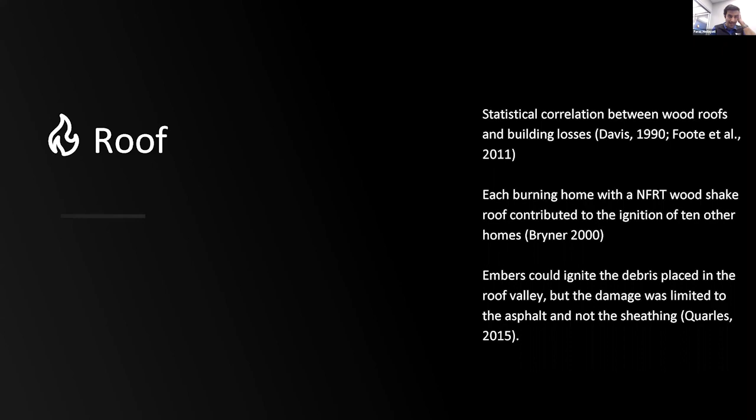So with that, roofs are, move this around here. Where's, I have, my clicker doesn't work for some reason. Okay, so

The first item that is important in Wildfire Prepared Home is roofs. Roofs are large elevated surfaces that are a prime location for embers and debris to land on. And when these two happen at the same time, so we have debris and then we have embers, well, surface fuel ignites easily, and then we have flames on the roof. And that's not what we want to see, right?

Roofs, because of their geometry, create low pressure and high pressure areas on the roof. And both embers and debris tend to accumulate at high pressure areas on the roof, typically roof valleys. And there are different ways that roofs are being evaluated in the field. You see some stats here. I'm not going to go through them, but the references and the quotes are there for you to look at the studies. But nearly all post-event investigations report a correlation between roof type and the damage level.

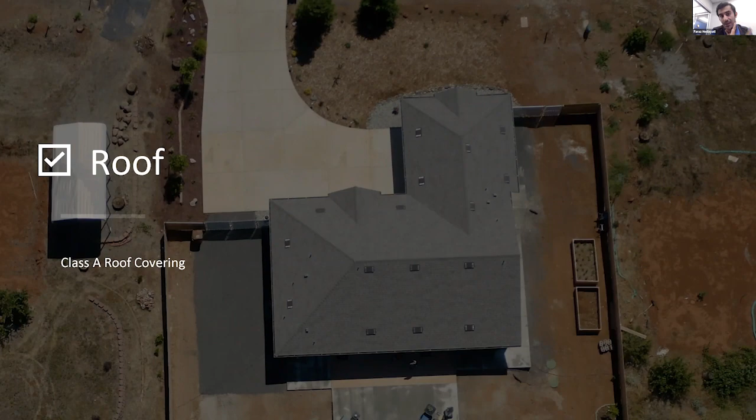And because of that, in Wildfire Prepared Home, we require the roof to be a Class A material. That's asphalt shingles, and 90% of the market is already that. But we also have metal roofs and tiled roofs or things of that nature, which are non-combustible materials. Those are also compliant with Wildfire Prepared Home designations.

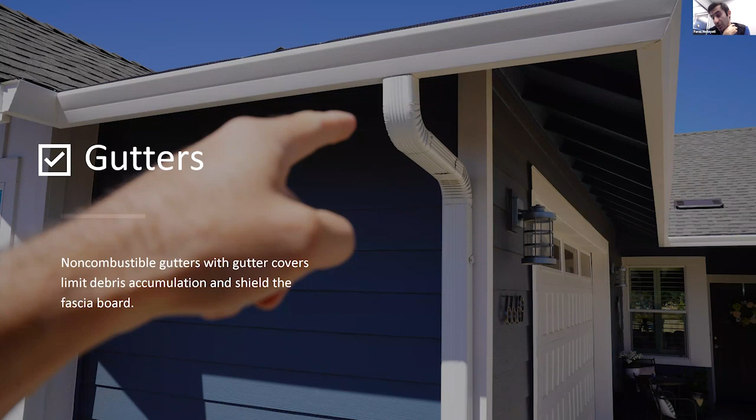So we require all the gutters to be non-combustible. The added benefit of that, beside embers, is that non-combustible gutters typically protect the fascia board or the other wood components in that area, rafter tails, for example. They protect them against flames and they don't ignite. We actually saw this happening at IBHS, where we unwantedly ignited the building after the vinyl gutter melted, and then the fascia board was exposed to radiation from big flames, and then we had ignition on the fascia board.

Next one is vents. Typically, the attic area is naturally ventilated, meaning it's natural convection. Hot air gets out from the ridge vent, and then the cold air gets in from the bottom part of the attic. But what happens in a wildfire scenario, because of the elevated wind speeds, the pressure distribution on the roof and at the vents changes. So the outlet vents could become inlet vents, because the pressure outside is higher than the pressure inside, and embers can get in.

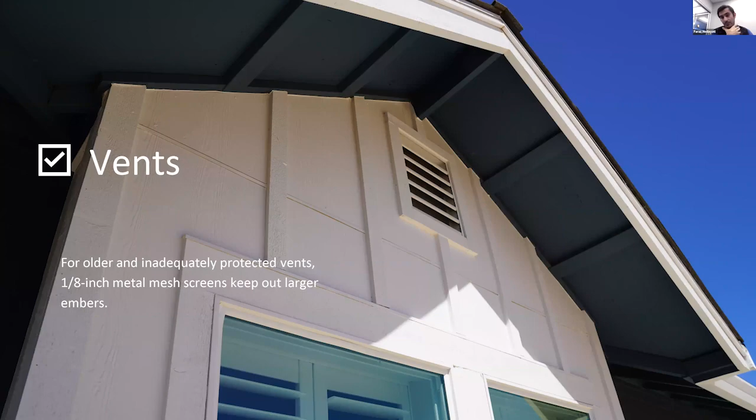And the caveat here is that if we see flames coming out of the vents, it's already too late to defend the building, right? So we want to stop this at the beginning, and we require a 1/8 of an inch mesh screen to prevent larger embers from getting in. If you look at the literature, other mesh sizes such as 1/16 are also recommended. I think that becomes a maintenance issue, because when it's that small, debris, dust, and all of those other things accumulate and block the ventilation, and we don't want unwanted consequences such as moisture building up in the attic area. And that's why we go with 1/8 of an inch, so it's not a maintenance issue anymore. So we require 1/8 of an inch mesh screen.

The other very important component that we require in both levels, and I'm talking about the base level here, is a 6-inch vertical clearance around the building. Remember I talked about high pressure areas on the roof? The base of the wall is also another high pressure area that we saw several times at IBHS. We are running a test, we are looking at vents, we are looking at windows, but we see ignition happen at the base of the wall. And that's because the heavier embers don't loft. They just roll on the ground because of elevated wind speed during a wildfire.

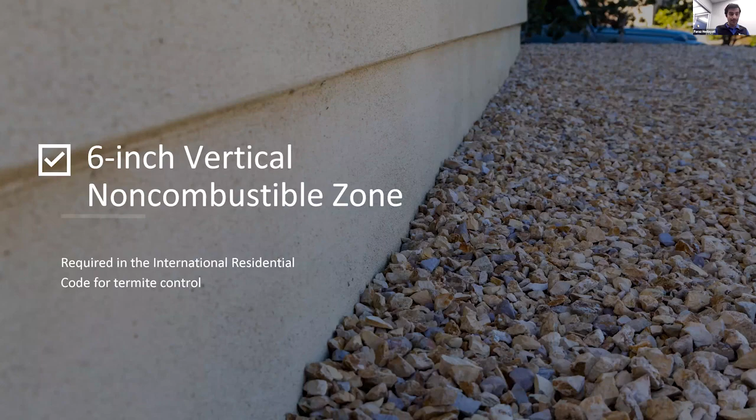And then they get stuck against the wall, and with the 6 inches around the wall, if there is a discontinuity between the fuel and the wall, the embers cannot convert to small flames. We will have, I don't know, thousands of embers accumulated at the base of the wall, but they're not touching anything to ignite and convert into flames. So it's just embers. Yeah, we require a 6-inch vertical non-combustible zone.

Defensible space. Numerous post-event investigations report a correlation between nearby vegetation and damage level. And in the next few slides, you see some of them. Syphard et al. analyzed some data that CAL FIRE generates. And the conclusion is if you reduce the vegetation density by 40% immediately adjacent to the building, the odds that the house survives after the wildfire are much higher.

And historically, if you look at defensible space literature, you see the philosophy behind defensible space was to reduce the intensity of the fire as it gets closer to the building. So typically there are two regions, 0 to 30 and 30 to 100, or the property line.

And the distance between shrubs or trees or any kind of vegetation gets lower and lower as it gets closer to the building. And that's because of converting tall flames into creeping fires.

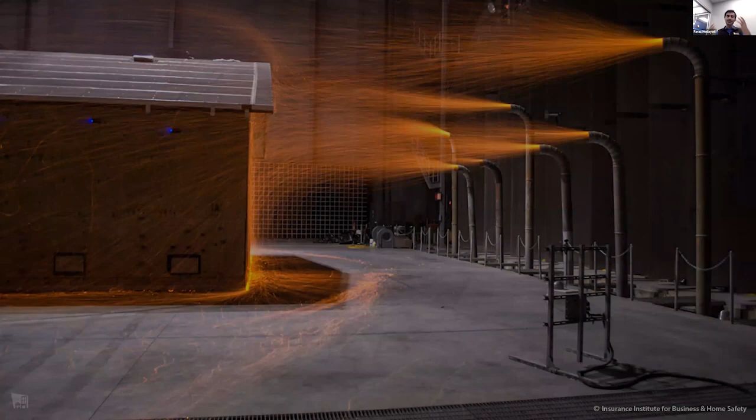And the reason behind this 0 to 5 foot, why it matters, besides stopping creeping fires, is that embers tend to accumulate at high pressure areas. And one of them is at the roof that I talked about, and the base of the wall, where you clearly see that glowing line at the base of the wall here. When the heavier embers hit, they just fall or roll on the ground and accumulate at the base.

The lighter embers, when they hit the wall, they bounce back. And you see that glowing arc around the building, right? And that is a function of building height. For a 1-story building, it's almost half of it. So a 5 feet clearance near a building would eliminate the chance of embers to convert to flames and expose building cladding to different flame intensities.

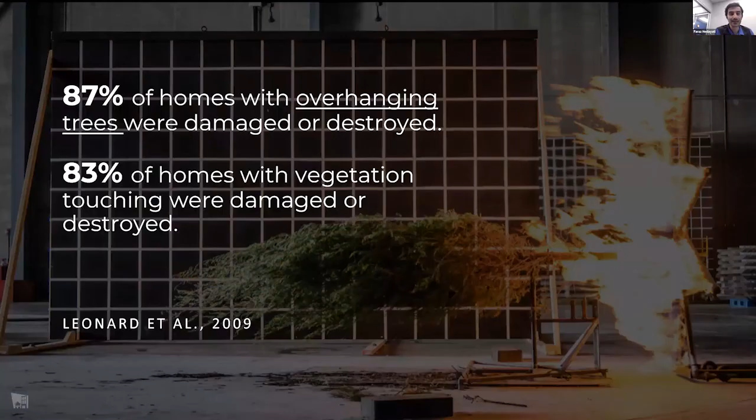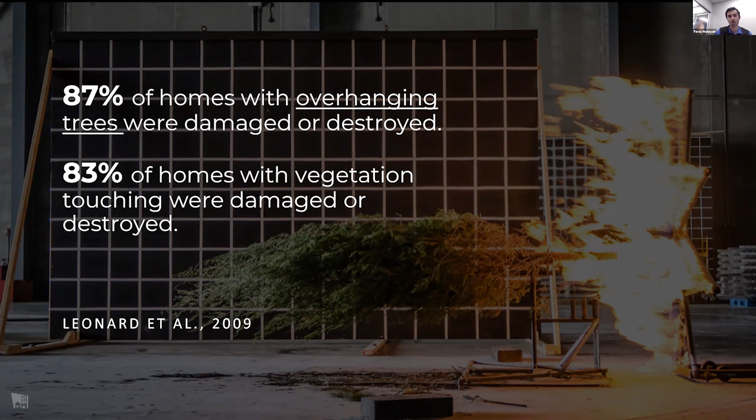And again, another stat from an Australian researcher: these are all 80%, 85, 87%, 83%. It's much higher than like 50 or 51. These are statistically significant numbers. Since the 90s, University of Nevada, Reno introduced the idea of the 0 to 5 foot non-combustible zone. And this was adapted by different organizations. IBHS started advocating for this since 2010, 2011.

And since then, there are more tools available for fire researchers to use and study this. One of them is aerial imagery. Zesty.ai, they fly drones around properties and collect the data. And when they looked at the 0 to 5 foot non-combustible zone around the building, they found a very interesting stat that it nearly doubles the property's survival rate.

And this 0 to 5 foot is what we recommend, but we see in the literature acknowledging 0 to 1 foot, 0 to 2 feet, 3 feet, 5 feet. All of those are available, but because we don't know, and this is an active project right now at IBHS, we don't exactly know what the risk is if we have something there. We take a conservative approach and go with the 5 foot while we are analyzing some data and running the experiments, and more will be shared with the public later on as we get more results of this.

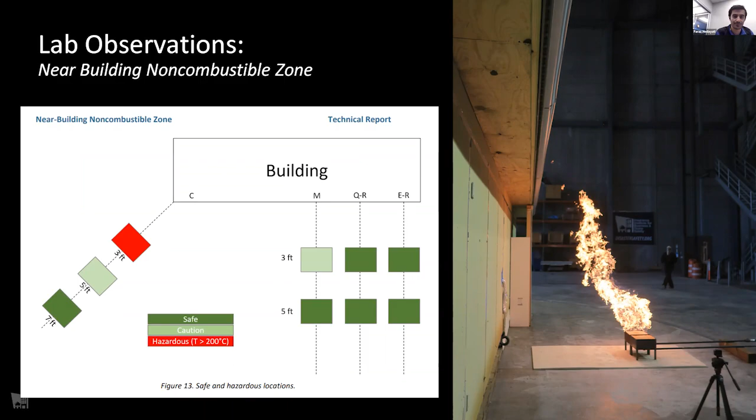And this is another test that we designed. It's a design fire, an 80 kilowatt fire source, 2 feet by 1, placed in different areas around the building. And we see that in most of the cases it's safe. At 3 feet, at the middle, it's caution. But at the corner, we actually ignited the building and we had to terminate the test. And that's why we go with a 5 foot non-combustible zone, because of this research.

The bottom line, we require a 5 feet non-combustible zone around the building to acknowledge embers and creeping fires. Fences are another source of fuel that exists in the 0 to 5 foot.

Can you see my screen? It's very choppy on my end. Yeah, we can see it.

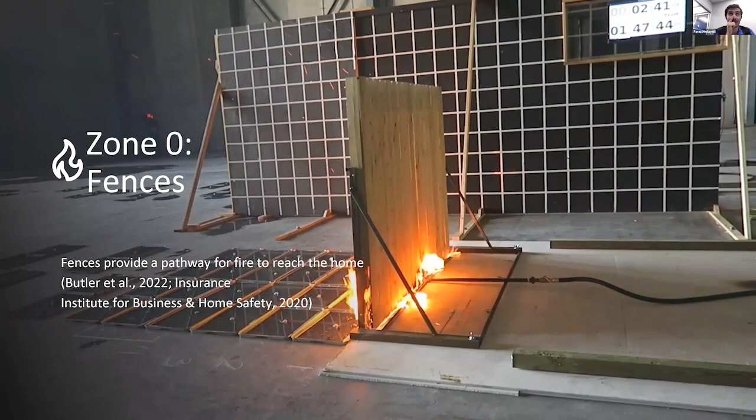Perfect. Yeah, these are again experiments that Steve Quarles done back in the day, about 10 years ago at IBHS. And we see how fences burn and how they can provide a pathway for fire to get to the building. You see 3 examples of Glass Fire, Marshall Fire, and Camp Fire. In Marshall Fire and Camp Fire, the fence was defended, so the first responders knocked down the fence and the building survived. If not, it could use the fence and go all the way to the building.

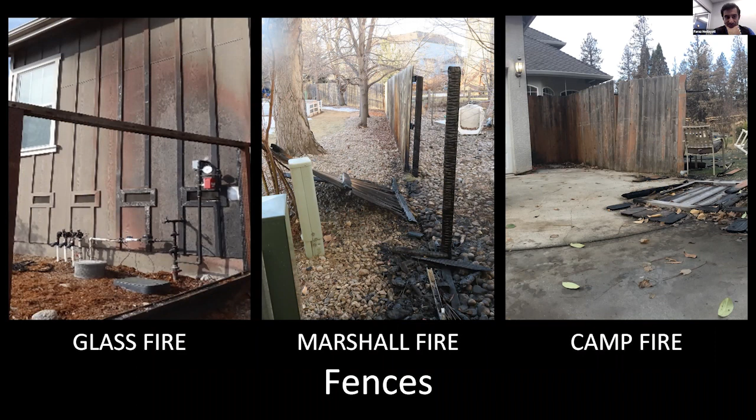The interesting thing here is that in the photo from the Camp Fire, the distance between the eave and the top of the fence is so low that the flames can easily touch. And that's actually like a multiplying factor into the vulnerability of the house if the distance is low and the fence is combustible. In the Glass Fire experiment, in my opinion, they were lucky that the window was not 2 feet to the right. Otherwise, the fire could break the window and get in. And again, that would be another story for this house.

So for fences, the section that is in 0 to 5 foot should be non-combustible. That's typically the gate or the door to get into the backyard. And there are off-the-shelf products available to use that are non-combustible, basically.

Decks. We studied decks since 2013, and this is still an active project, so it's been about 10 years. Decks are vulnerable to two different threats. One of them is embers accumulating on top and igniting the deck. The fire typically starts at the gap between the deck boards above the joist. That's the first place that ignites. And then it uses the joist to get closer to the building.

And this is a very, very slow moving fire. It takes 5 to 6 hours for the fire to get to the building, or travel 5 feet. A more severe exposure is when embers fall between the boards and ignite material underneath, then we have an underdeck flaming feature. That's a much more severe exposure, and that can ignite the deck, and then the fire can get to the house.

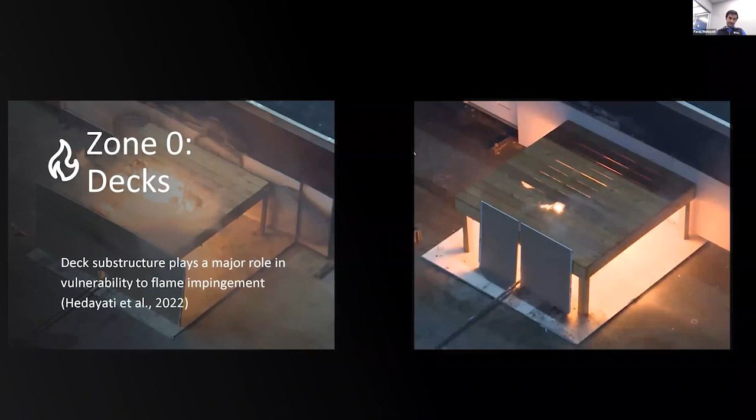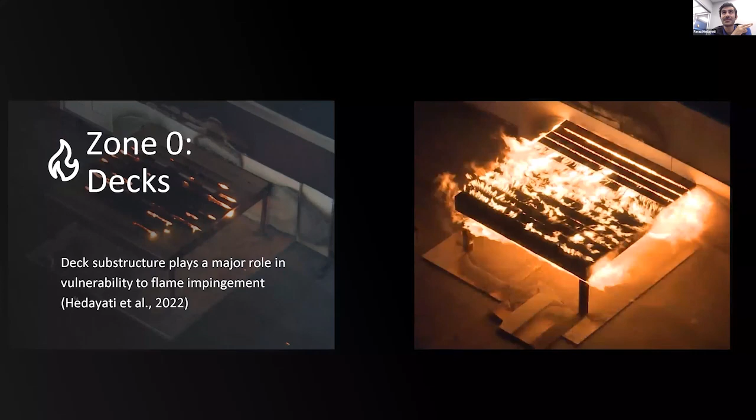These two videos, so I tested these decks back in 2019. Both of these decks are compliant with Chapter 7A. Chapter 7A refers to ASTM E2632, if I'm not wrong, and that only considers the walking surface of the deck, not the entire assembly. The walking surface in both of these decks is redwood, but the joist on the left-hand side is a metal joist, and the other one is southern yellow pine, which is a common joist material. And we see the difference, right?

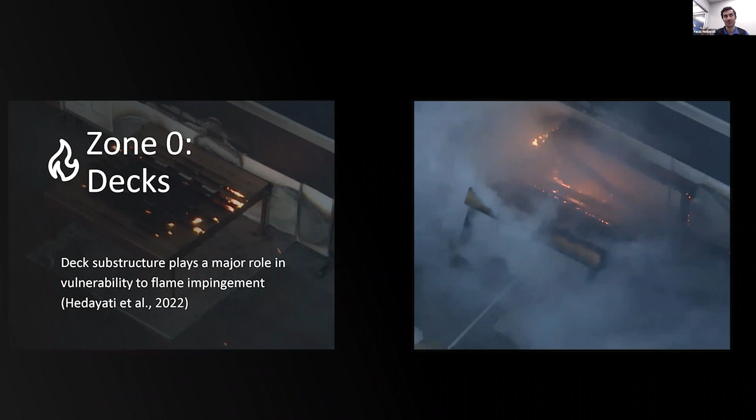And we are writing a proposal to change the ASTM test method. Instead of looking only at the walking surface, look at the entire assembly, because obviously the walking surface does not discriminate the performance of the deck. So in Wildfire Prepared Homes, at the base level, we require enclosing the underdeck area so debris cannot get in. And when embers fall between the gaps, they don't have any fuel to ignite.

So this was everything about embers. I want to move to flames, but I guess I can pause here and we can have a Q&A about ember threats if you have questions about what I went through.

I did have a question. This is Denise. Regarding heavy embers, I've never really thought about that, and I haven't heard a lot of discussion about heavy embers versus light embers, but it makes a lot of sense. I think we all do realize that the embers do like to accumulate against solid surfaces. A lot of times in these wildfires, there's a wind event, and so these embers are pushed or rolled or blown.

The heavy embers, I'm assuming they have more radiant energy contained inside them, so they would stay hotter or burn longer. Is there any testing that's been done on, once an ember gets into that right spot on your house, how much time your house has to resist a heavy ember versus a smaller ember?

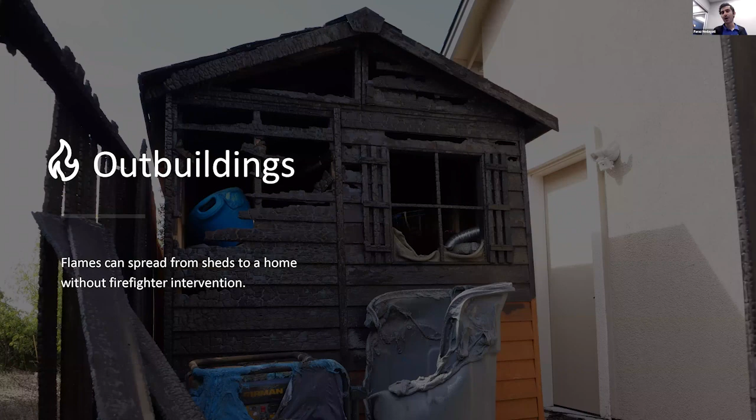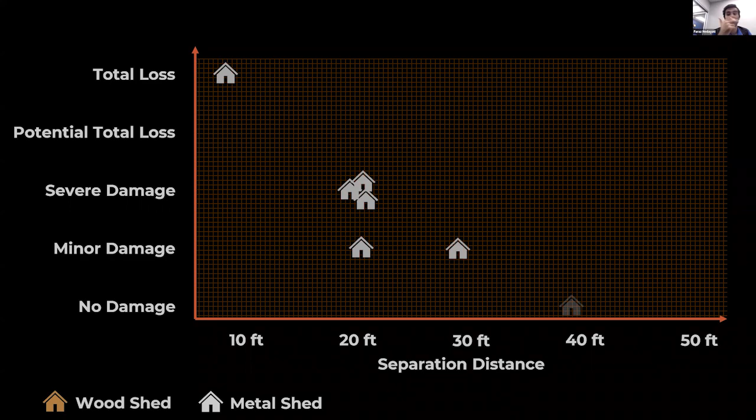And then we change the distance, 30 feet, 40 feet, 20 feet, 10 feet, to see how the building fails and which areas actually failed earlier in the experiment. We categorized the damage into 1, 2, 3, 4, 5. Total loss is when the building ignites. Potential total loss is when the window fails in a way that there is an opening so embers and flames can get in. Severe damage, window failure, siding failure, that type of thing is very expensive to fix. Minor damages are very cosmetic damages that can be fixed by the homeowner; in other words, no professional is needed. And no damage, obviously no damage.

And you see the different ways that we saw the damage happening. The wood sheds are the brown ones and the silver one is the metal shed. At 10 feet separation it is deterministic. 100%, we tested two buildings at 10 feet. In both cases, we had total loss.

So similarly, at 40 feet, this is again the deterministic. It's 0% that there would be any damage on the building. What happens between 20 and 30, we get into probabilities of how buildings fail. For example, at 20 feet, we had 6 tests, and 4 of them had severe damage. So 4 divided by 6, whatever it is, is the probability of severe damage at 20 feet, and so on and so forth.

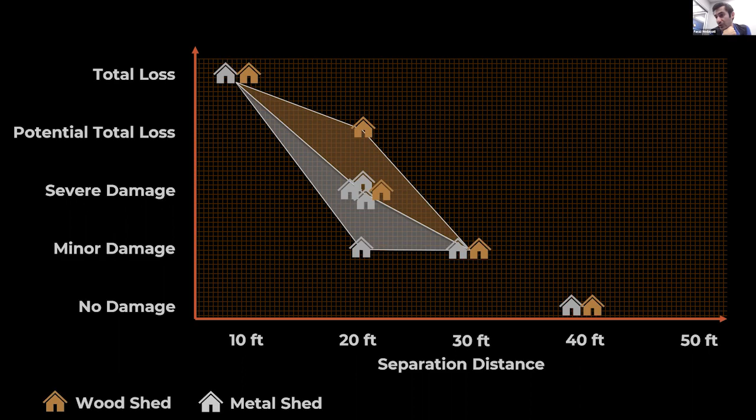We can look at this data like this. One way to look at it is that the severe damage is like an S-shaped curve. So at 10 feet, 100% severe damage, and then it rapidly declines as we get away from the building. For minor damage, 30 feet is the maximum, and we will not have any minor damage at 10 feet or 40 feet. So for the probability density functions, one of them is an S-curve, the other one is a normal distribution.

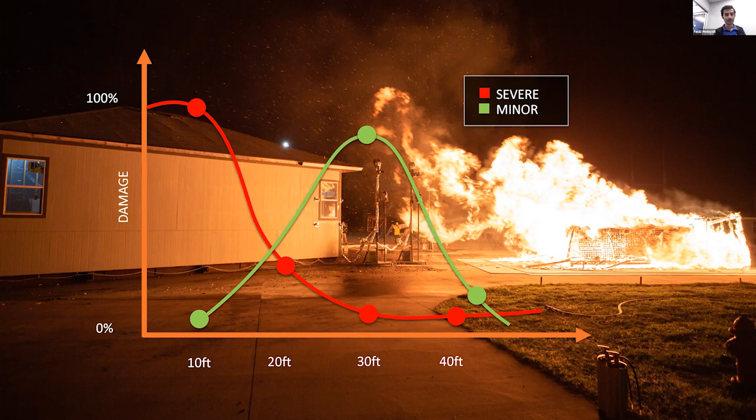So for outbuildings, we require all the buildings to be 30 feet away, and this is in the plus level. In the plus level, we look at embers and flames. In the base level, it's only the embers. Another thing that exists on the parcel level is fences beyond zone 0. The only requirement that we have is that we don't want any back-to-back fencing.

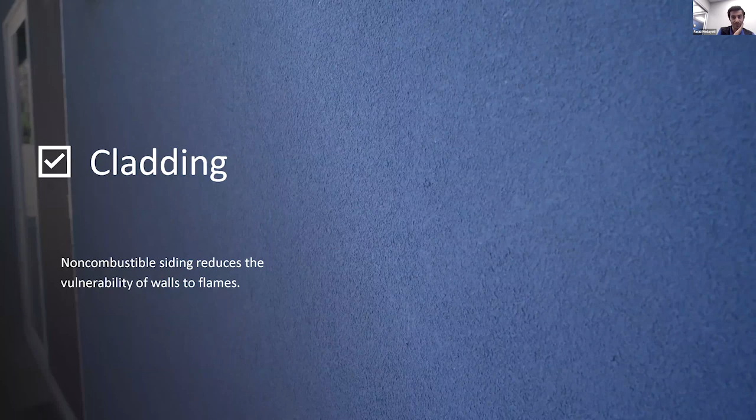And remember when I started, I talked about the gutters. So this is the case. Half of the building had vinyl gutter, the other half had metal gutter. The first thing that happened was the gutter melts and then exposes the fascia board. We tested this 2 times, it exposed the fascia board, and the fascia board ignited. So a non-combustible gutter also protects the fascia board against the flames. So for the plus level, the cladding needs to be non-combustible.

Windows are vulnerable mostly to radiation and flames. Double pane windows are more resilient than single pane windows. Tempered windows are even better. The way these windows are manufactured, the double pane window has 2 panes of glass, and there is a metal frame in between with some adhesive that puts them together, and there is vinyl glazing that puts extra pressure. When they are exposed to heat, the first thing that happens is the vinyl glazing melts, so there is no extra pressure. And then the adhesive melts and the pane just pops out.

Right now in Chapter 7A, the requirement is only 1 pane to be tempered. If that's the case, the inner pane should be tempered because the outer pane always falls. We want to have the stronger pane still in place, which is counterintuitive, right? We don't want to wear a t-shirt on top of the jacket. That's how I look at it. But in this case, the stronger or more resilient pane needs to be inside.

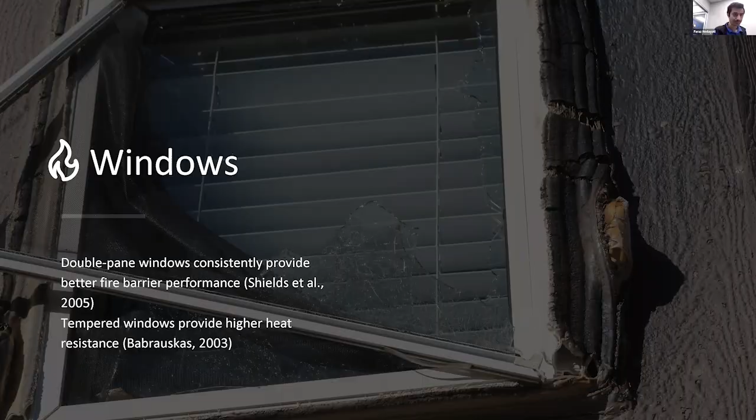And we require at least a multi-pane window with at least 2 panes tempered for Wildfire Prepared Home Plus level. And there are some anecdotal studies about doors and how they work. Well, this is from Marshall Fire. We see embers accumulated at the base of the door and ignited that, but it was suppressed or self-extinguished, I don't know. But the house survived. So based on these anecdotal observations, we require a fire-rated door for Wildfire Prepared Home Plus.

And finally, the under bay area, you see the geometry is primed to trap heat. In this photo, you see the vegetation in the under bay area is torched and the other ones are less burned, basically. And we require that area to be enclosed.